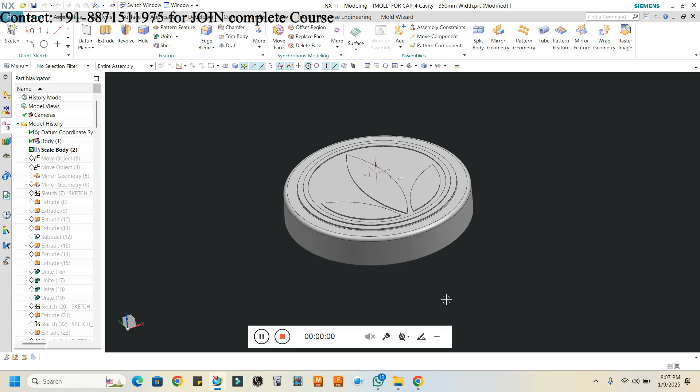So today our topic is about the three plate mold, and today I will also review a complete mold for this component.

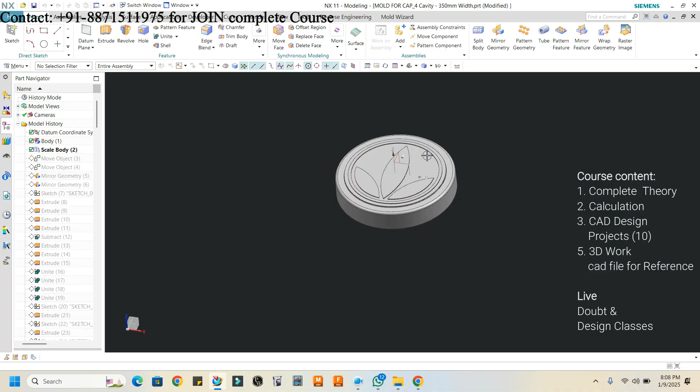So for this component we will see a two plate mold, but this is also known as the hot runner mold. So today I will show you this mold, and as well I will show you this three plate mold also. Now you can see there.

See here, this is a single cavity right now. So customer has a requirement, just for an example, customer has a requirement of four cavity. And customer told us that the mold should be cold runner, and should be auto degating.

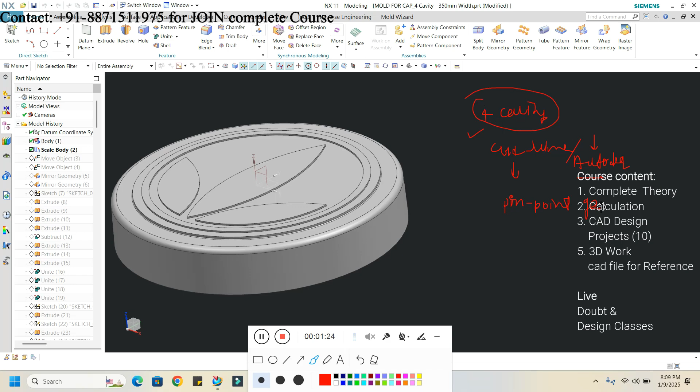If the customer needs cold runner, and they need auto degating also, what is the meaning of this? That with the four cavity I have to prepare the pinpoint gating system, right? Pinpoint gating system.

So first of all I have to prepare the layout for this, right? Now see, this is the component I have. I'm moving this component just for the manufacturing feasibility.

And one more thing, customer also needs auto ejection. Auto ejection, first of all the feed system and the component will separate automatically. That's the first thing, and customer needs stripper plate ejection also. So I have to prepare the mold depending upon the customer requirement.

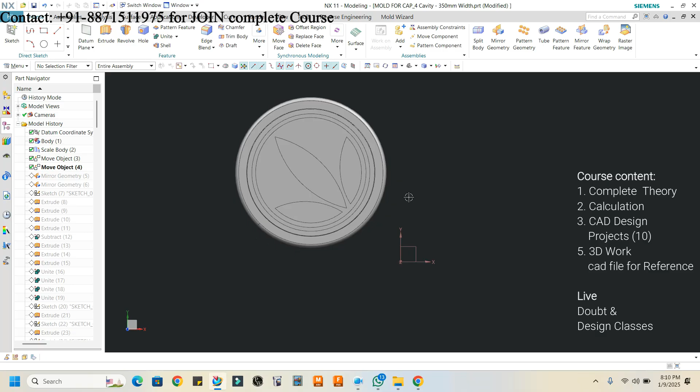Now you can see that this is the first component here. And with the manufacturing feasibility, as we know, from one component to another component there should be a distance of about 15 to 20. So you can see here, this is the single component here, and here I'm preparing the layout.

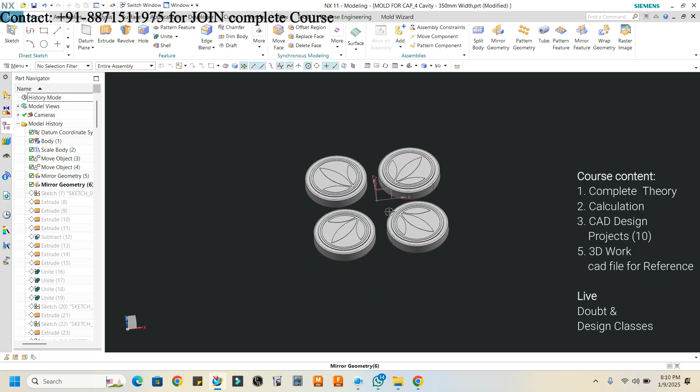Okay, now see, this is the four cavity. Now I will prepare just a sketch, a sketch for the pinpoint gating system, or the auto degating mold first of all, and a stripper plate mold, you can say.

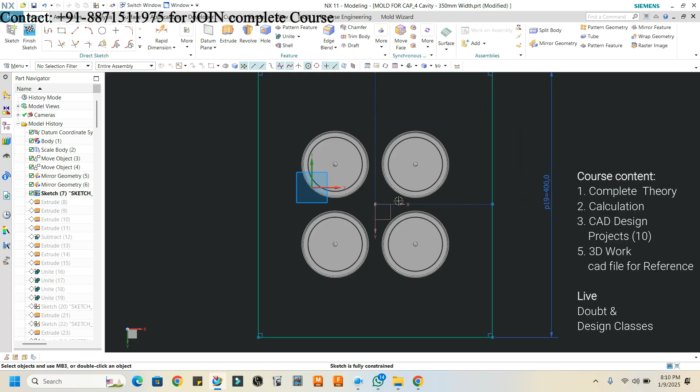So I will prepare the mold length and width. This mold length and width is depending upon the machine which we will select. Machine selection is depending upon the projected area of the component first of all, right?

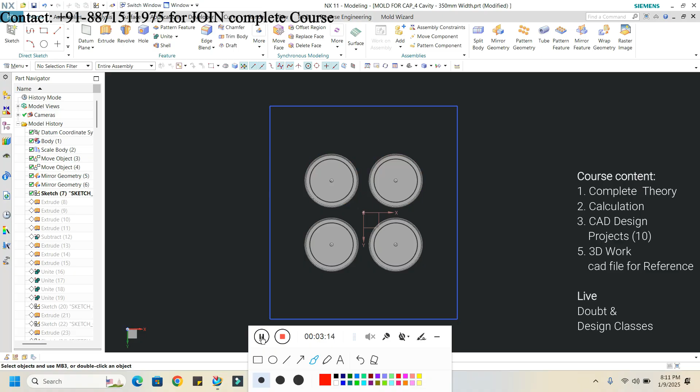Okay, one minute. Sure, okay, I thought that you would not present, so I should prepare the recording of the lecture, that's why I have started, right?

Get it. Okay, so today we will discuss two types of molds. Here, see here, you can see that this is the component we have. Now what is the customer requirement? As we know, we have to prepare the mold depending upon the customer requirement, right? Yes sir. Okay, now this is the component we have, right?

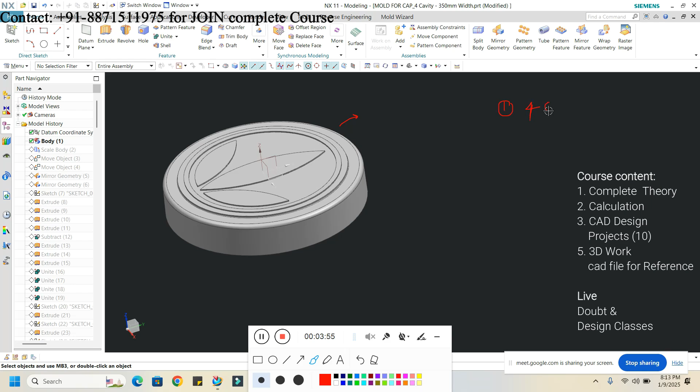Yes sir. Or you can see what is the first requirement of the customer, that customer needs four cavity. Yes sir. Or second thing is they need auto degating, okay, auto degating.

With the cold runner system, and third thing is they need stripper plate also, stripper plate ejection also. So this is the customer requirement. So depending upon that customer requirement we have to prepare the mold for this component.

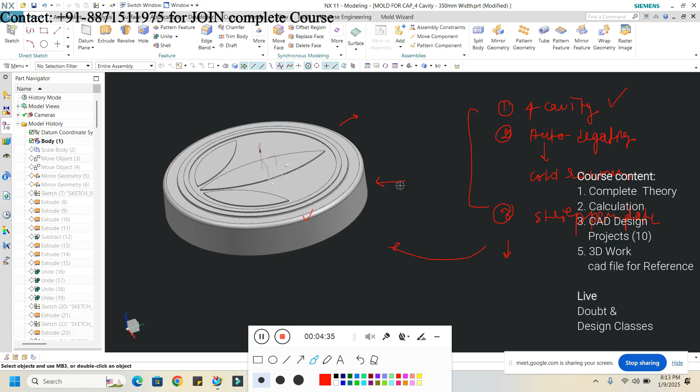Understood? Okay, so first thing is what calculation we need for this? First thing is tonnage calculation, as I told you, right? Tonnage calculation, depending upon the projected area of the component, simple is that, and multiply by number of cavities and injection pressure, so we will get the tonnage.

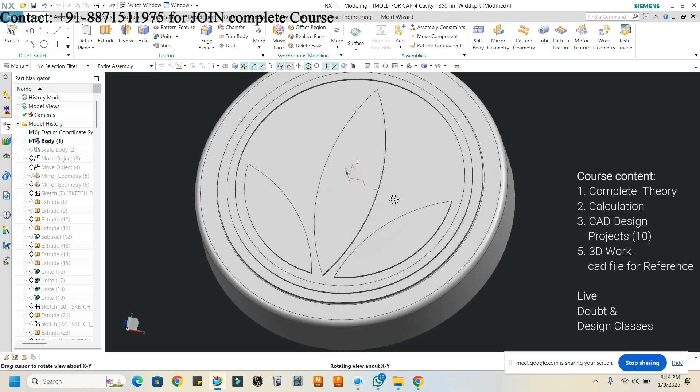So we find which machine is required for the four cavity of this component, right? Yes sir. So this is the component we have. So here you can see, and depending upon the manufacturing facility, I am preparing the layout for the 4 cavity.

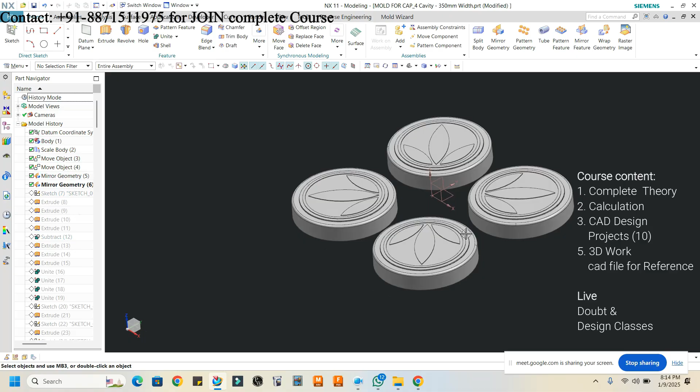Okay, now see, this is the 4 cavity, right? Yes, sir. So as I told you, from one component to another component, how much distance should be there? 20mm, or 15 from one component to another, or 20.

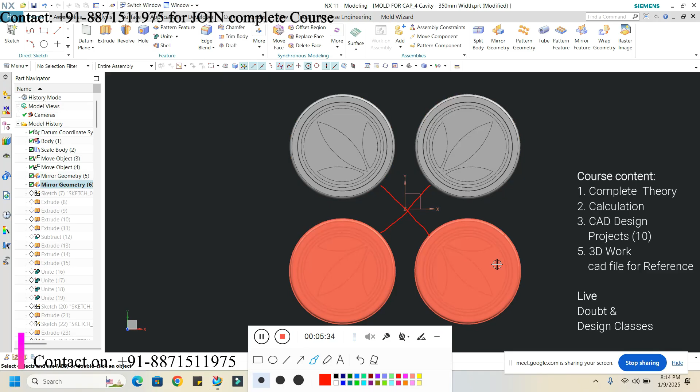So in this layout, I will prepare the runner like this. This is the shortest path for the runner, that's why. So depending upon the tonnage calculation, we will prepare the layout.

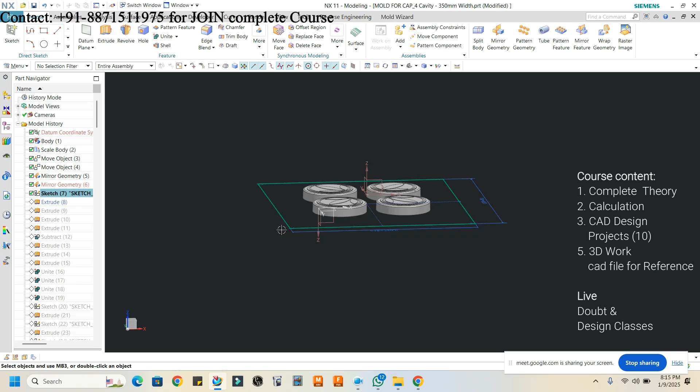This is the mold length and width, depending upon the tie bar distance of the machine, right? So I am taking the distance 350 and 400 depending upon the machine right now. Just I am taking the distance.

Now this thickness is also depending upon which thing? Cooling area, yes, cooling area. So this is nothing but the stripper plate, right? This is the stripper plate. Right now I am taking 20 thickness for the stripper plate.

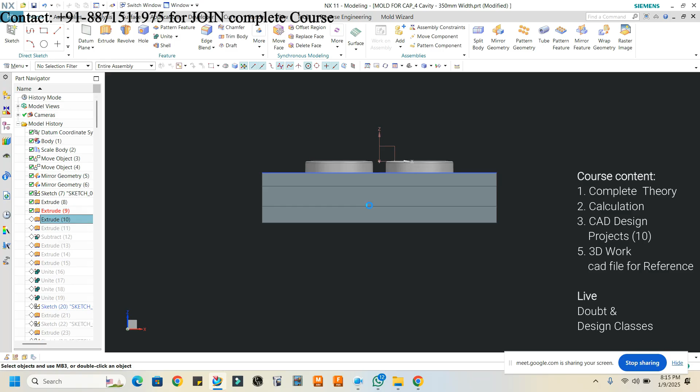And what is this? That is core plate. Core plate, right? Again, core plate. One more plate is this. What is this? I can take as back plate. Core plate, you need a back plate, sir. Back plate, so I can take as back plate.

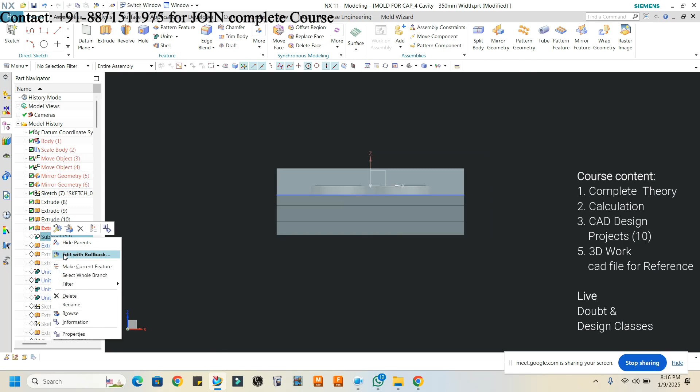Now again, what is this? Cavity plate. Cavity plate. One more. So just I am preparing the core and cavity first of all.

So here you can see, this is not the core, but this is the part of the core, right? And which will be attached with the core plate, right? Or here this is the cavity. This is the cavity, yes.

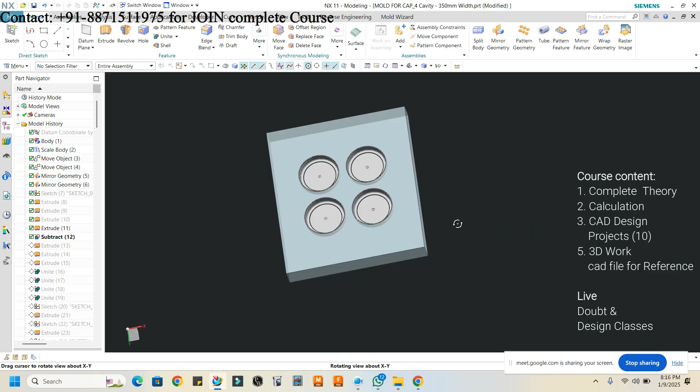Okay, just I'm reviewing the mold. Now see, here, as I told you, this is the stripper plate. This one is the stripper plate.

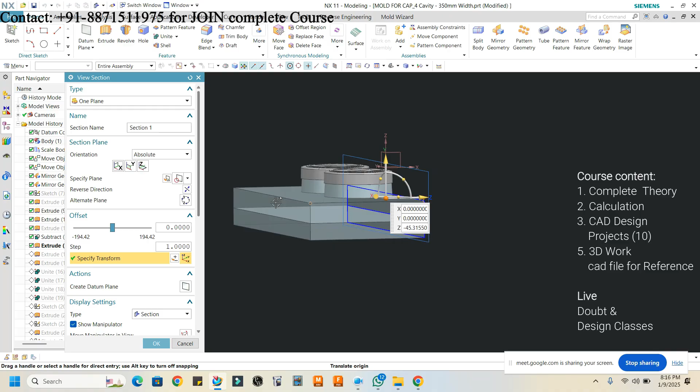So you can see that into the core there will be the draft. Why draft? For ejection purpose. Now in order to eject the component in a proper way, see here, that's why we need a draft into the core.

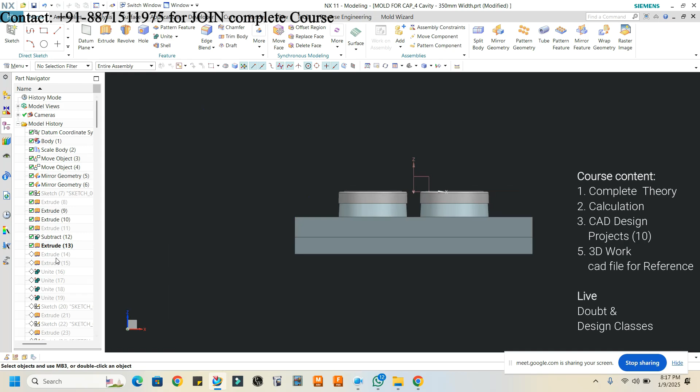So this draft will be in the stripper plate also, right? Sure. So here you can see that this is the core right now. Now I'm extruding this portion also, see here, and now it will be straight. Right? Now here, see, this is the collar for the core.

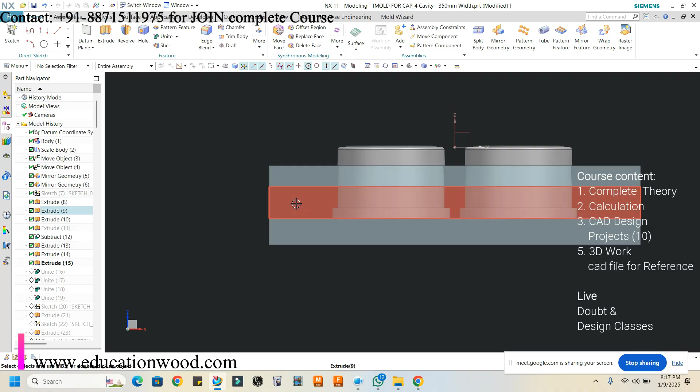Now you can see that this is the stripper plate, this is the stripper plate, this is the core plate, this is the collar, and this is for the support back plate, right?

Now just I'm uniting all these things, all the core portion, right? Control H, and see the cross section view. Just see the cross section for the proper operation. See here, right? Understood?

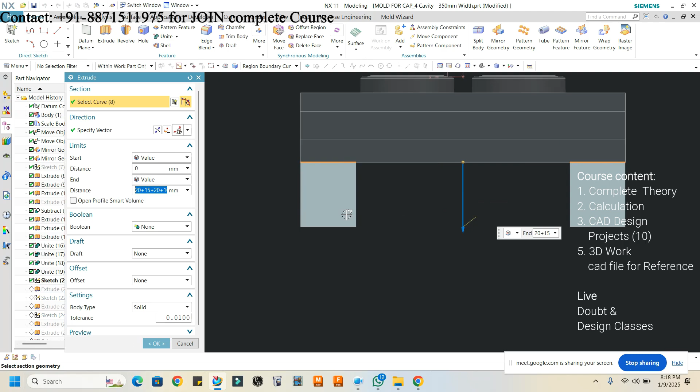Now see again, what is this? Spacing, spacer, right? So we are just preparing the mold base right now. Now see, here thickness of the spacer plate height is depending upon the component height.

Height. So here you can see that 20 plus 15 plus 20 plus 10 plus 5, because we have considered the ejector plate and the ejector back plate also with the rest button.

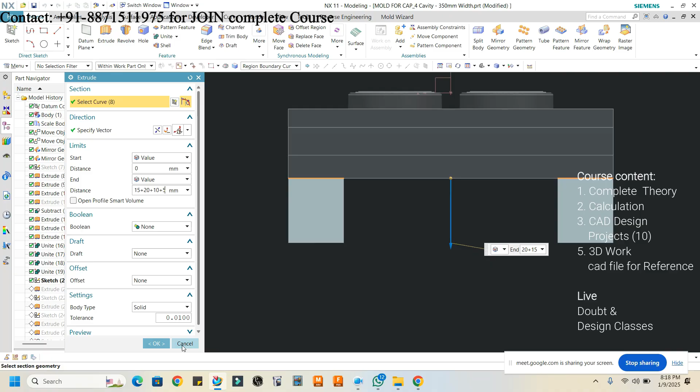Now see, one more plate is bottom plate. Prepare the ejector plate and ejector back plate. So we are preparing the complete mold base.

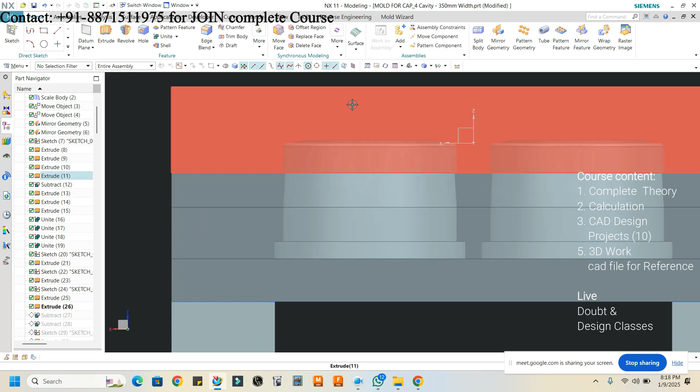Now, as we know, this is nothing but the cavity, right? This is the cavity. Now here you can see that. This is the cavity. If this is the cavity, so basically where will be the runner here?

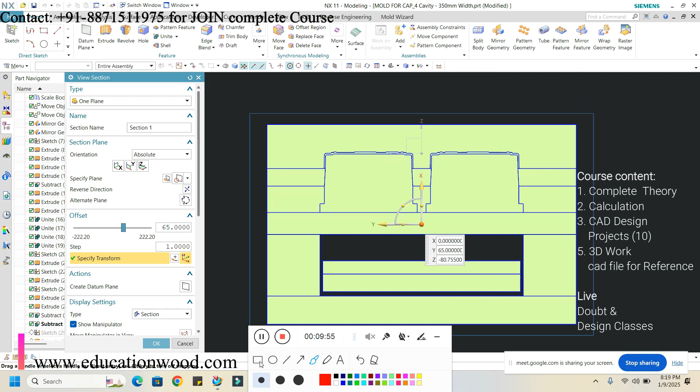You'll go for pinpoint runner. Yeah, pinpoint. So runner will be like this. The runner will be on top of the part. So it will be like this.

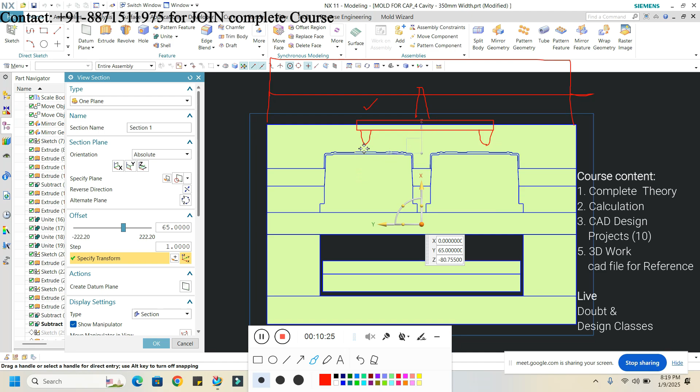So this will become the runner plate, and again one more plate will be the top clamping plate, the top plate, right? It will be look like this. So here you can see that this is the designing, or this is the concept for the three plate mold.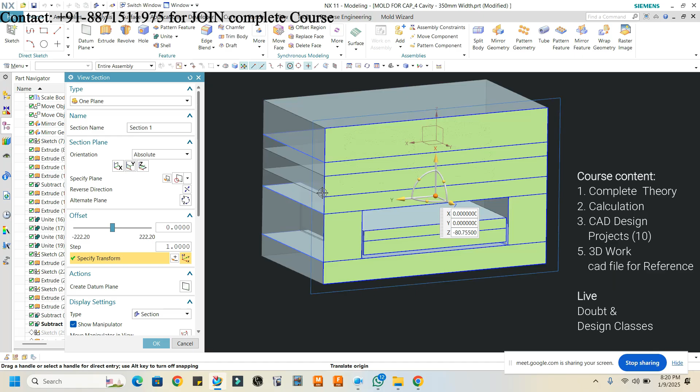Concept for the three plate mold, depending upon the customer requirement, right? So basically this mold will be open from two parting lines, from two faces. It will be open from two faces. From where it will be open?

First, it will be open from here, right or wrong? Yes, sir. It will be open from here also, and it will be open from here also. See, why? In order to eject the runner. So here, for ejecting the component, it will be open from here, and for ejecting the runner, it will be open from here, from two faces. Understood? So that's why it is known as three plate mold.

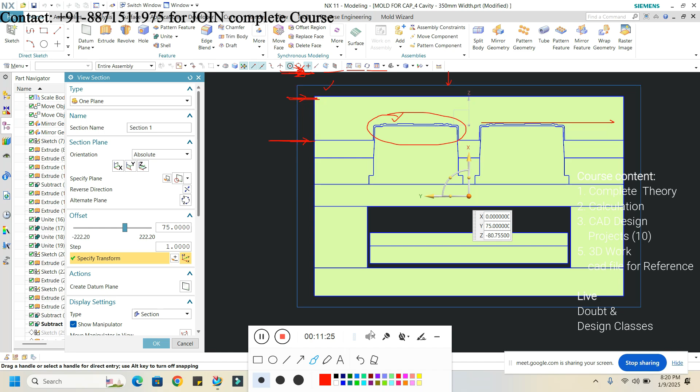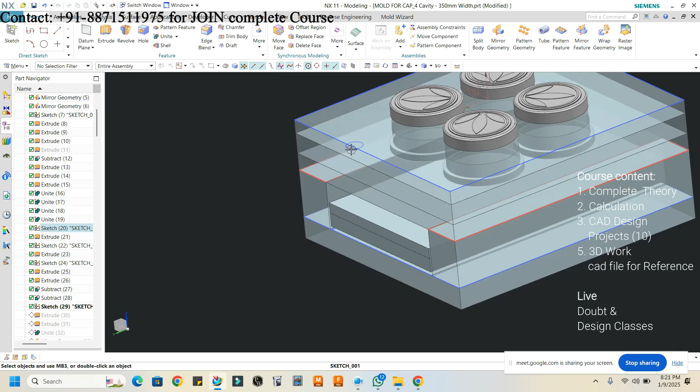Okay. So I'm creating here. One minute. Here you can see what I'm creating. This is the cavity plate. I'm just creating movement for the stripper plate. How will the stripper plate be moved? See.

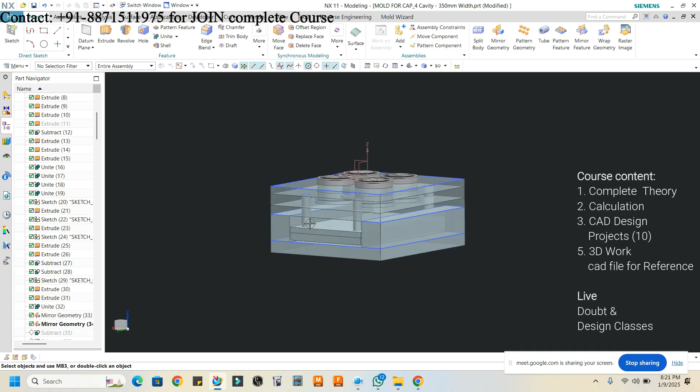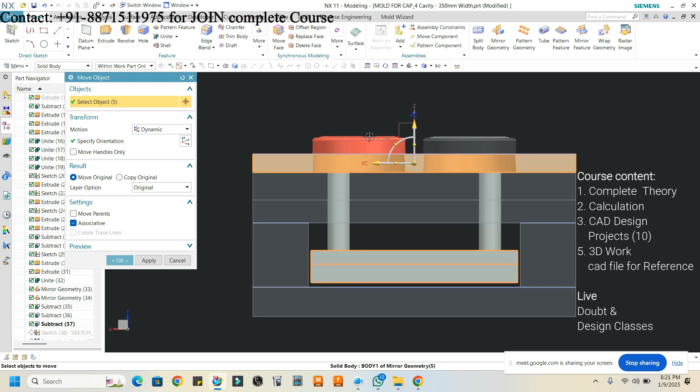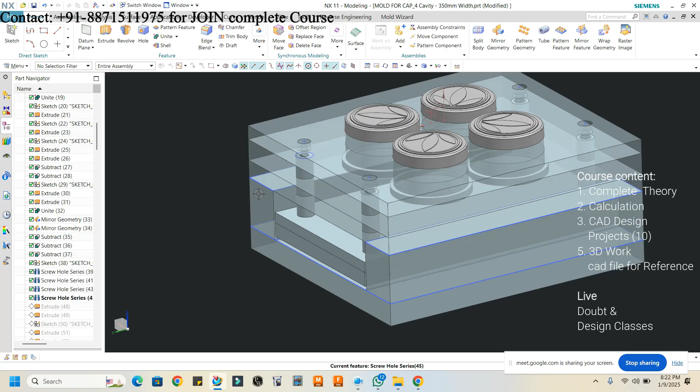Okay, sir. Understood? The concept should be clear. If your concept is clear, then all will be okay. Now see. As I told you, we have designed 4 bars here, and these bars are connected with the stripper plate. Now take the bolting for the proper connection, right?

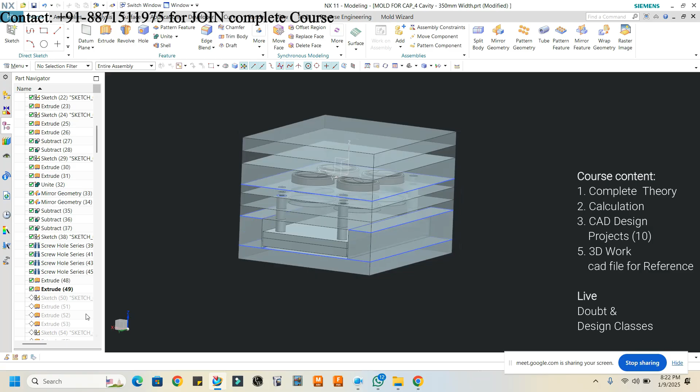Now see here, I am preparing 2 more plates. This is for the runner plate. This is the runner plate, and this will be the top plate. Top plate, right? Now I will create a sketch on the cavity plate, on the face of the cavity plate. See.

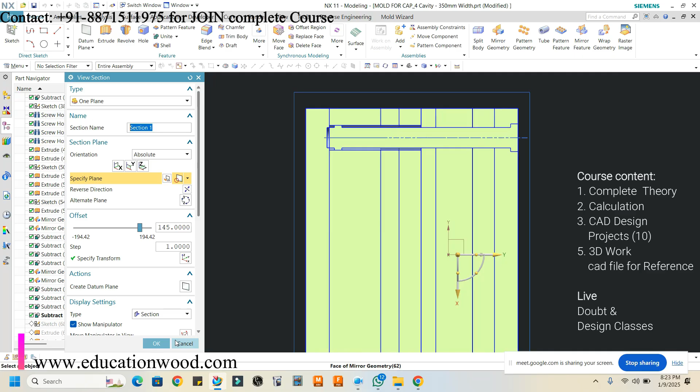Now again I will create one more thing. What is this? Guide pillar and the guide bush we have to create, right? So I am just creating the guide pillar and the guide bush. See here. And here see the cross section again. One minute. Again I am using the mirror. Here you can see that it will be like this. This is the pillar, one kind of pillar. Okay. Now see.

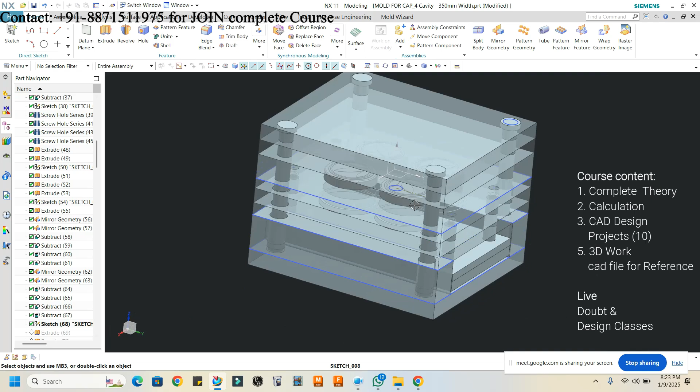One more thing: if you want to understand completely how the 3 plate mold will work, we have to understand the concept for this, right? Because it will be quite confusing. Now see, here you can see that. What is this? My voice is clear?

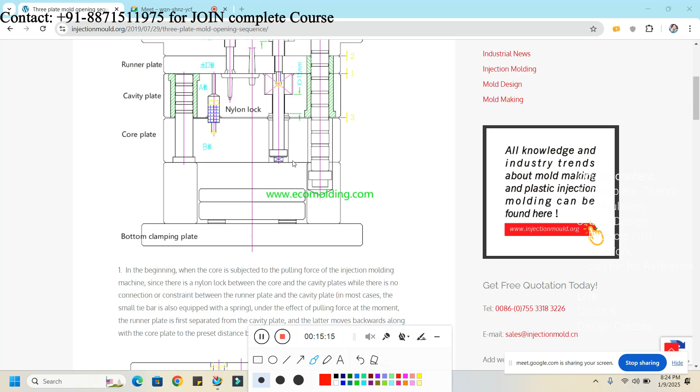See, this is the mold, right? Here you can see that this is the runner plate, as I told you. This is the cavity plate. This is the top plate, and this is the core plate. Here you can see the complete guide pillar and guide bush, right? So it will be open from here, here and here, right? Now see, it is not opened right now.

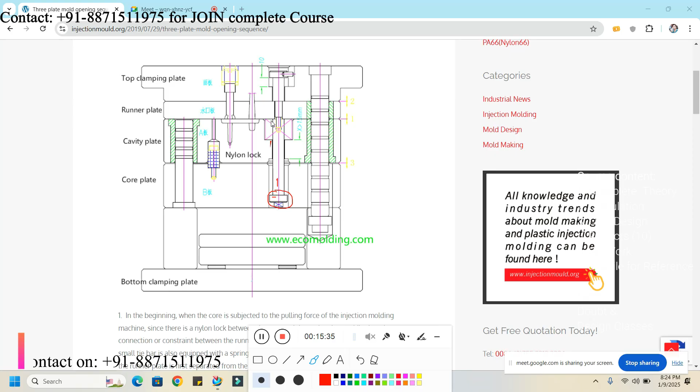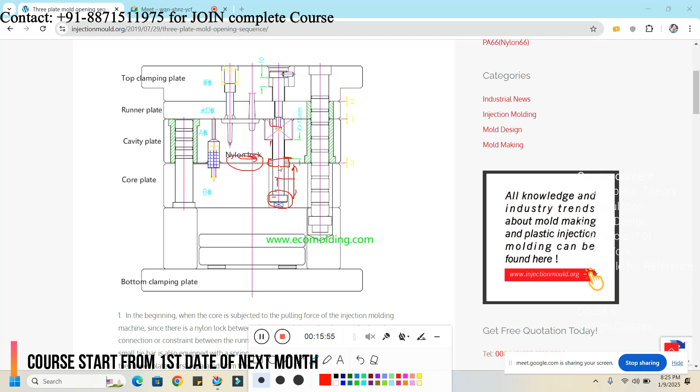Now you can see one more thing, one more rod here. So what is the purpose of this rod? Basically, once the mold opens, this rod will be stuck here, and it will stop here. So this is the limit for the opening, by which your component will be ejected.

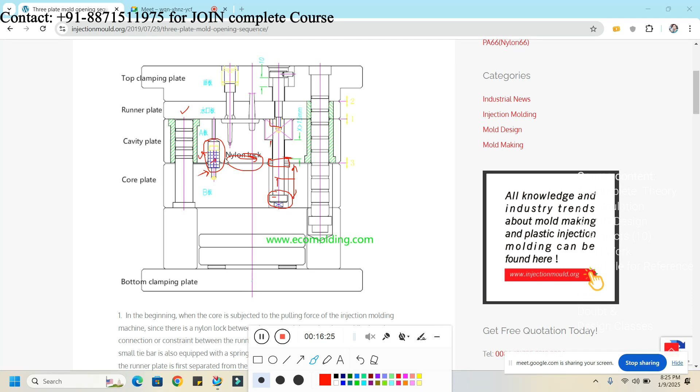Here you can see the nylon bush. What is the purpose of this? It's like heat transfer? To reduce heat transfer? We are using the nylon bush here for holding this cavity plate while we are opening the runner plate or other things. That's why. So basically the cavity will be floating type, right or wrong? Yes. So it can be open in the initial stage, but we have to hold this plate for some time.

That's why this nylon bush will work with this core plate, right? So the nylon bush will create the suction. Okay, so that's why we will use the nylon bush here. Now again you can see here. What is this? Puller. Sprue puller. Yes.

So the puller is connected with the runner. Why? Because once the runner plate moves, it will remove the runner portion. While the runner plate is in locked position, it will be stuck into the runner, right? Yes. Okay. Now this is the closed condition right now. Now this is the open condition for the runner. So first the runner will open and it will be detached from the component, right?

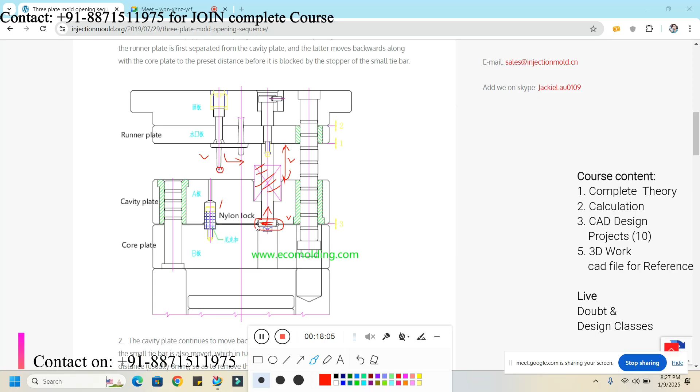Yes. Understood? So here you can see this is the spring, this is the position of the locking bolt, right? So this is the limit for this. This is the opening limit from which I can remove the runner. Understood? Once it reaches this distance, then it will move the cavity.

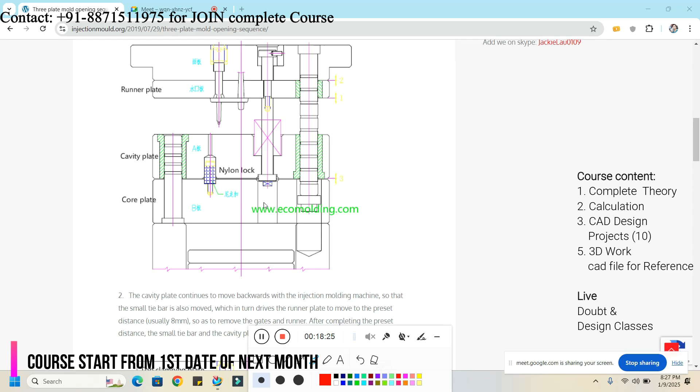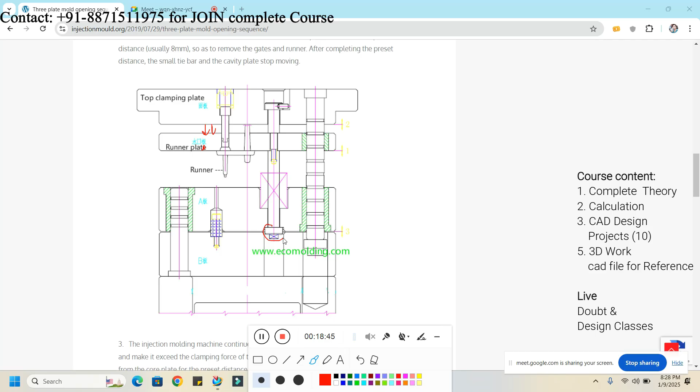See here. While this portion is opening, the nylon bush is working for clamping the plate on the core side. Core and cavity. Okay. Now you can see that the component is ready. You can see the opening of the runner plate, by this restriction. Because it will move from here also. Yes, sir. Okay. Understood.

Now here, see. Now it will be the floating type cavity. And this is the nylon bush again. Nylon lock, you can see that. Now once the cavity opens, the component will be ejected from the mold. Understood? Yes, sir. See, it will be in floating condition right now, right?

Now here, what is this? This is one more guide pillar and guide bush for aligning this cavity. So we have to use one more pillar and guide bush for aligning this cavity. And with the cavity, I am using the stripper plate also. So for aligning the stripper plate, I have to use a guide pillar and guide bush again.

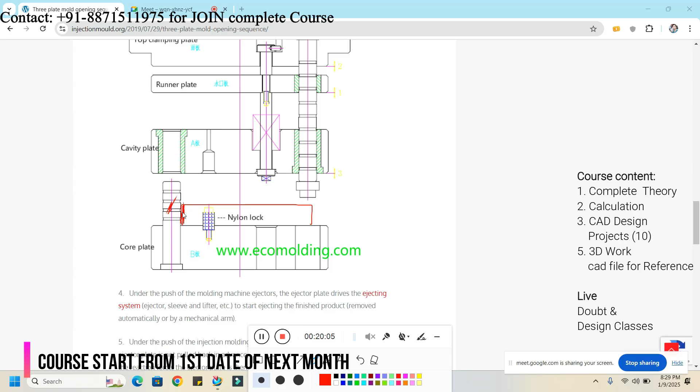Yes, sir. If I separate the stripper plate, for example, and I am not aligning the stripper plate with this, then for the stripper plate I have to prepare one more guide pillar and guide bush, right? Yes. Okay, so this is very important. Is it clear? Yes, sir. This working is quite complicated, but sometimes we have to prepare it depending upon the customer requirement, which is the three plate mold, right? Okay, sir.

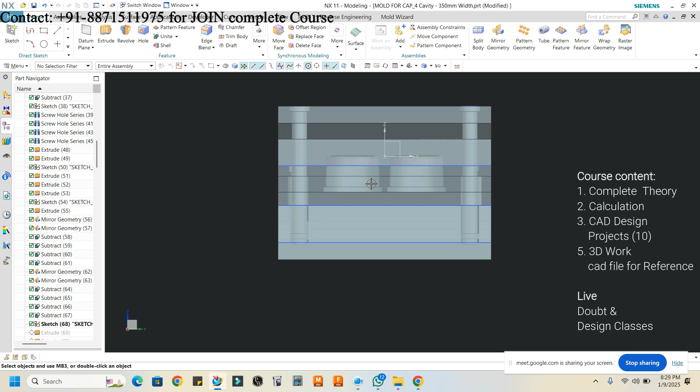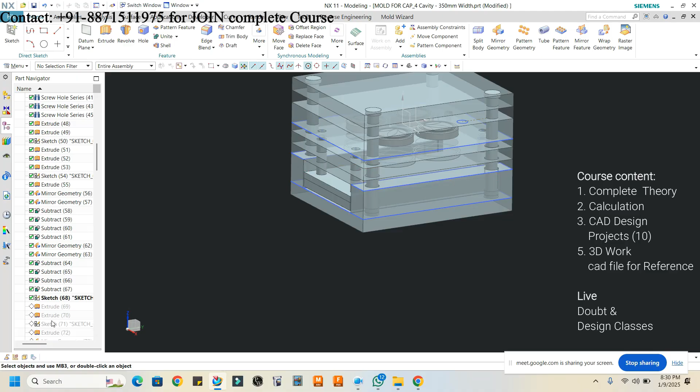Now see here, this is the guide pillar and the guide bush, and we have prepared one more guide pillar and guide bush. And what is this? Back plate. This rod is connected with the stripper plate, which will move the stripper plate with the ejector plate, right? Understood? There are lots of elements here, like the locking nut, locking plate. So we have to prepare them one by one.

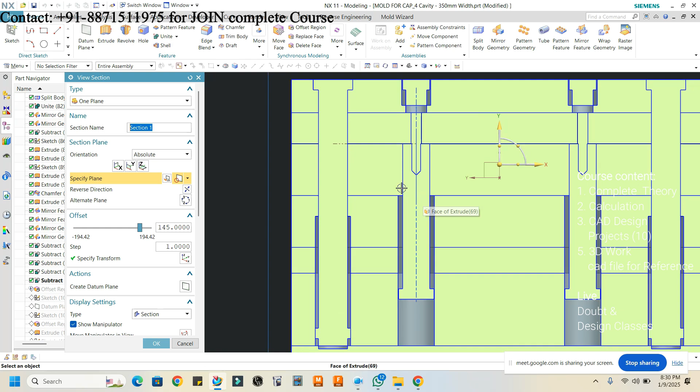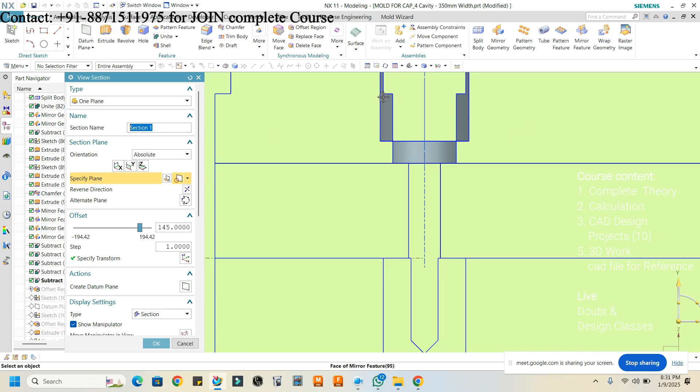Now see. What is this? Which one, sir? One minute. Runner point. So this is for the runner plate. The runner plate and the top plate will open at this distance, right? And once this distance is covered, this portion will be free. This face will touch this face, okay? Then the runner plate will open. That's why I'm opening this. See here.

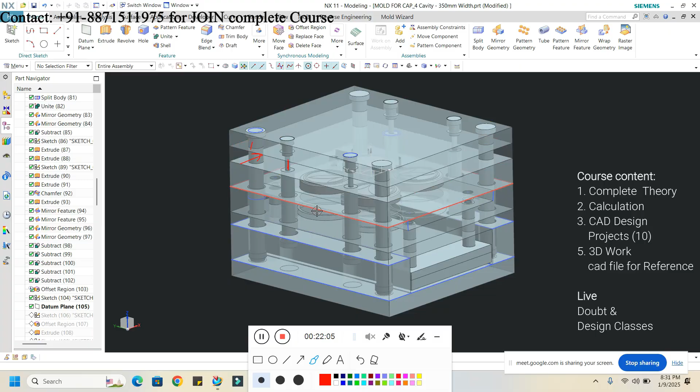Understood? So basically I have prepared a few components, like guide pillar, guide bush, locking nut, limit nut or limit rod, right? Okay, sir. And what is this? That is the stripper plate, runner plate. Yes.

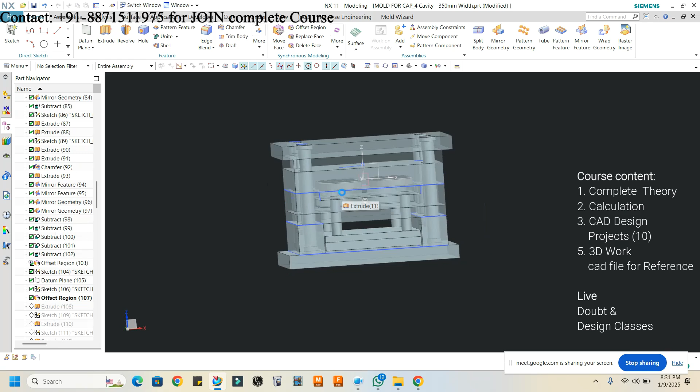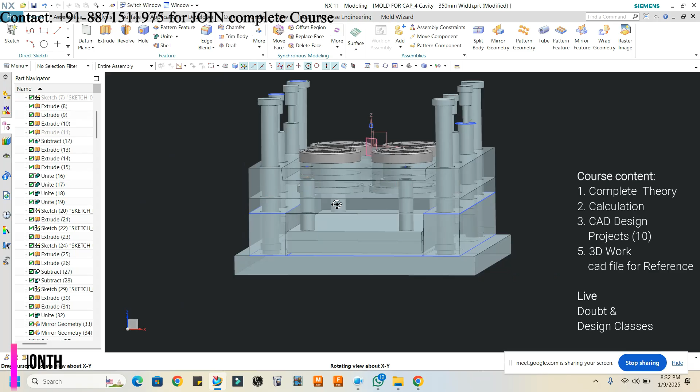Okay, so as I told you, what we are doing here: we are separating the stripper plate. Okay, sir. And again the stripper plate is connected with the same thing. Okay, so right now I will prepare the runner. See, runner.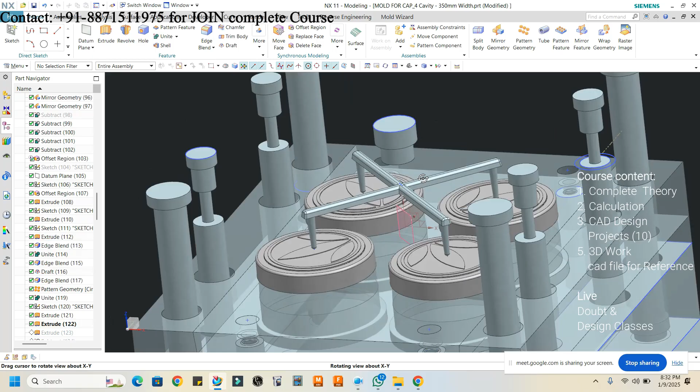See. Okay, this is the runner. This is the gating system. Now this gate diameter is depending upon the wall thickness of the component. What is the average wall thickness of the part? Yeah, so it is D equal to N into T. N into T, number of cavity into thickness. So we have to prepare the diameter first of all, right? This initial diameter is depending upon the average wall thickness of the component.

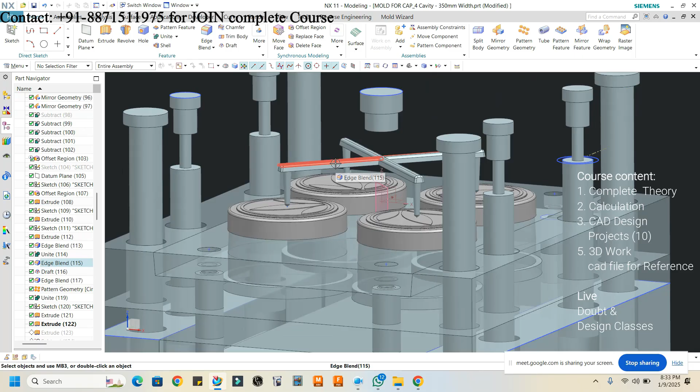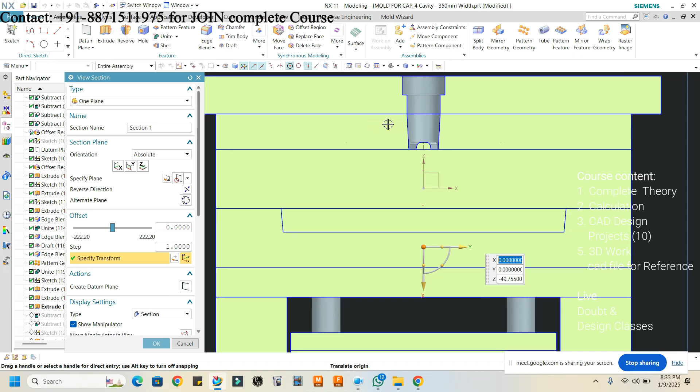So this is the complete runner, which will be inside the runner plate. See? Yes, sir. Which will be inside the runner plate. Here you can see that we need a draft also. So the bush will be like this. Why? Because the runner plate will be moved in this direction, right? That's why we need draft here. So as I told you, it is quite complex, but we have to understand the mechanism. I'm just showing you.

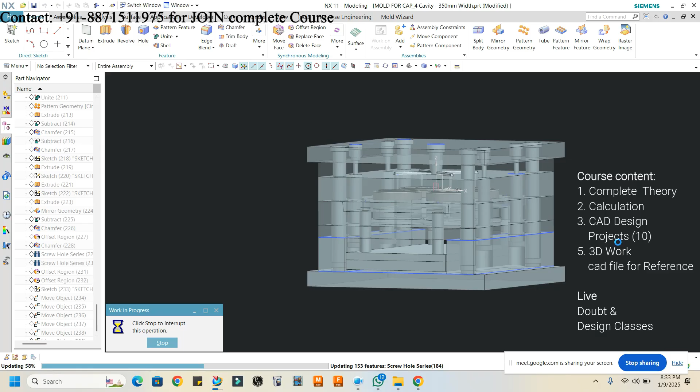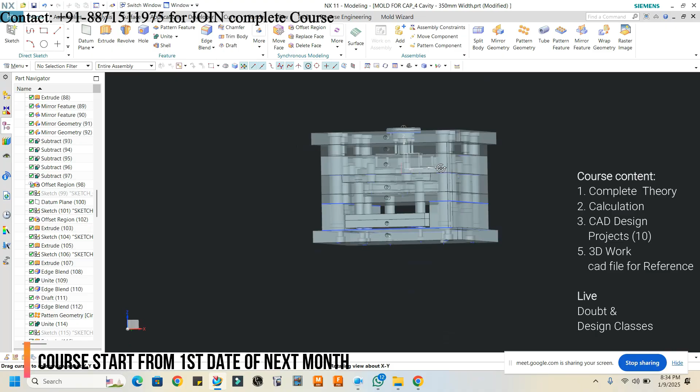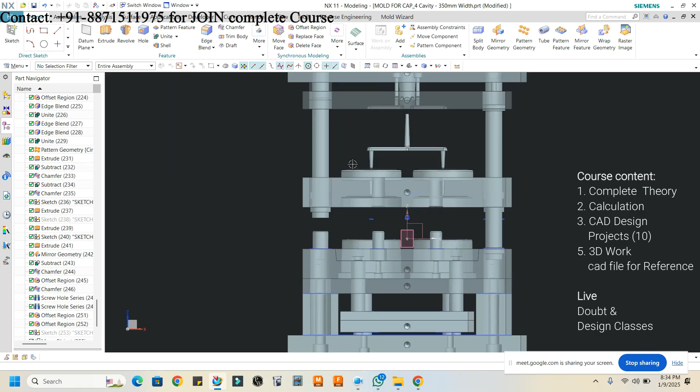Lifting holes, screw bush, runner, locating ring, top clamping holes. Okay, now see here. So what will be the working? How it will work? Sir, one doubt. Maybe on the side you should give a locking mechanism for clamping all the three plates in a guide profile. I'm not speaking about the guide bush or guide pillar. An outer interlock should come for clamping.

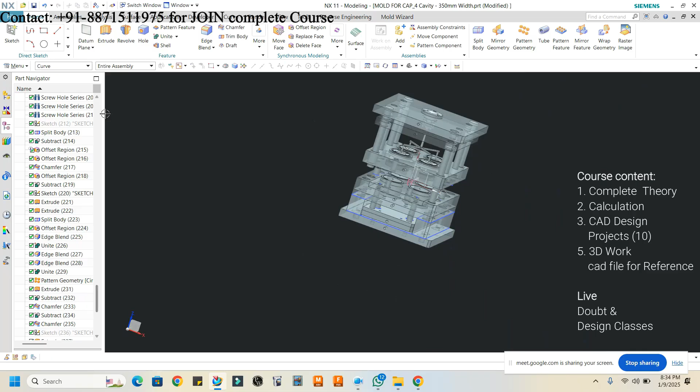Similarly, you will have one straight profile where back plate, core plate, cavity plate will be connected, since it is floating right now. So basically, you are saying that there should be an interlock, right? Yes, all three should be interlocked. We can provide the interlock, but apart from that, we have provided the guide pillar and guide bush. In that itself, you have given a collar type for stopper. Yes, sir. We can provide the interlock also, there is no issue. For proper center alignment, the interlock will work more precisely, right?

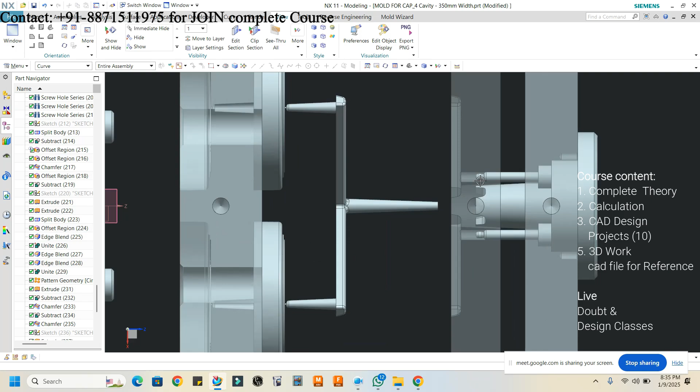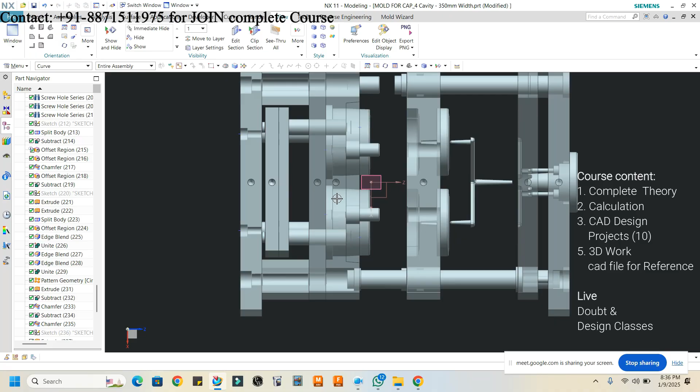So here you can see the working. This is the runner puller plate. This is the runner puller. This is the limit from which our runner will open, right? And this is the position where your component will be ejected by the cavity and the back plate. So this is the complete mold. For designing this complete mold, if your concept is clear, you need at least 5 to 6 hours, right? So you understood this?

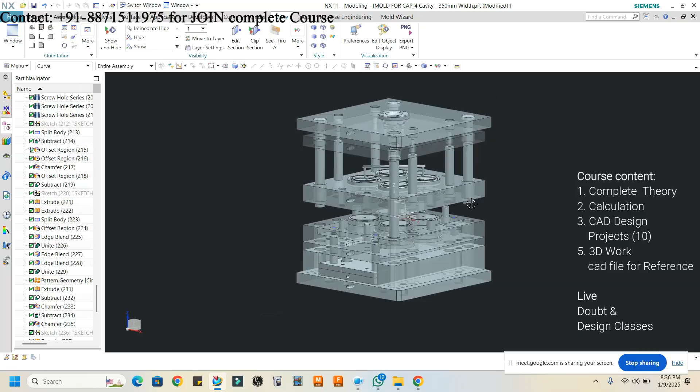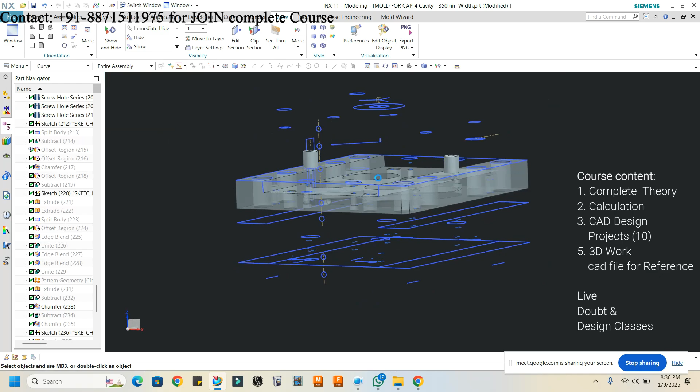This is the 3-plate mold. Where is the nylon bush here? See, this is the nylon bush. Which one, sir? This one. So this is obviously a plate ejection type, sir. Yes. We don't use any ejector pin; only plate ejection. Stripper plate ejection, right? Here you can see the stripper plate ejection.

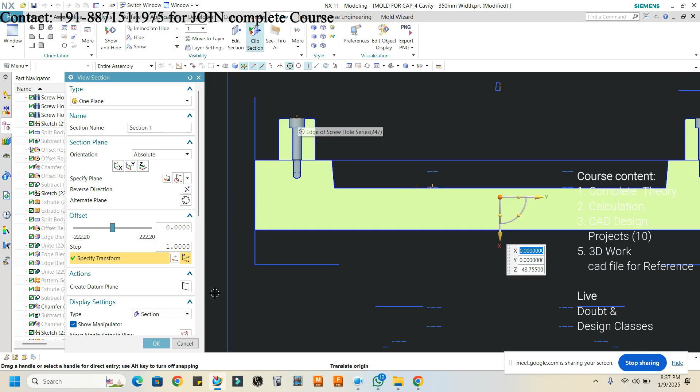Yeah, this is the nylon bush, and in the nylon bush we can provide the draft. From the upper side, I have given the bolting, and this nylon bush will create the friction to the cavity plate, right? And in the cavity plate you can see this is the hole. Okay, sir. So this is the 3-plate mold system.